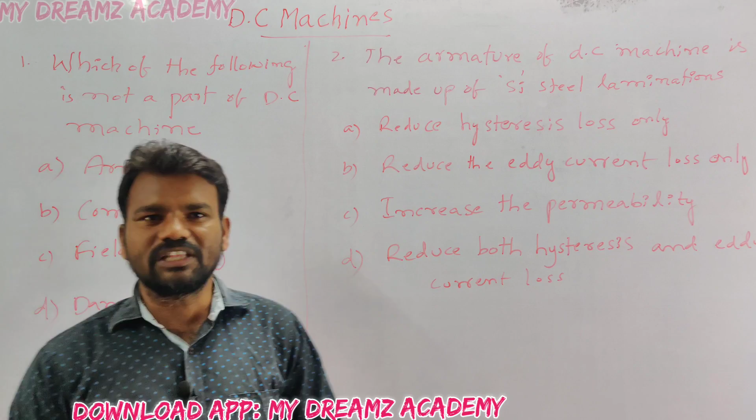Today we will see the DC machines topic. So in the DC machines, many questions, 8 marks questions will come here.

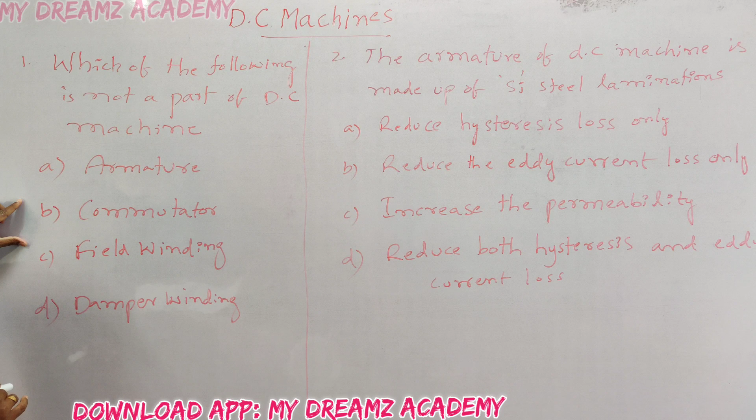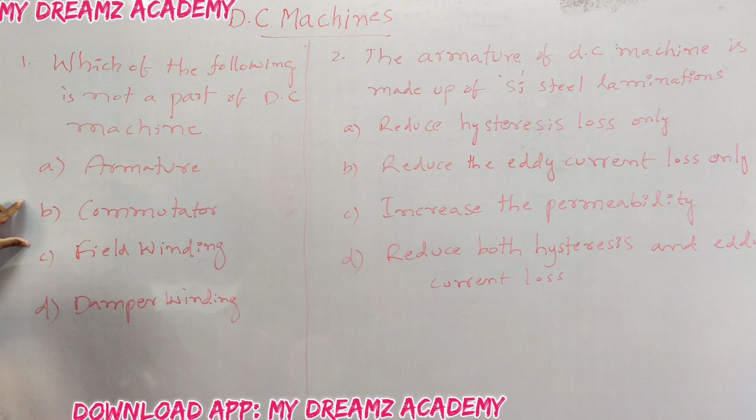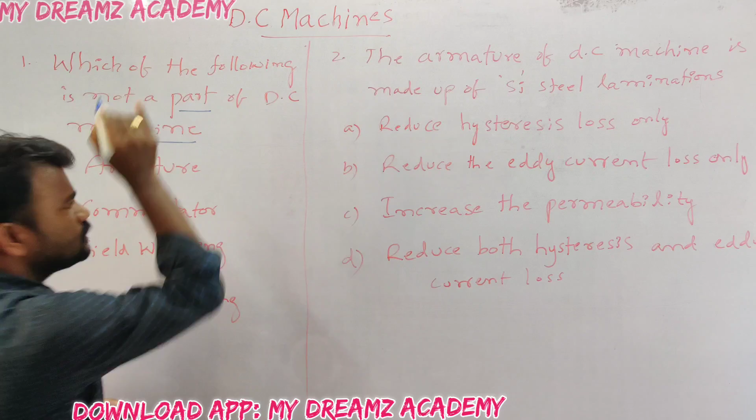Okay, which of the following is not a part of DC machines? So in the DC machine, how many parts we have? Part of DC machine. So here mainly it is our construction, yoke. The magnetic poles are attached here, the magnetic poles, and this one is the yoke, north pole and south pole.

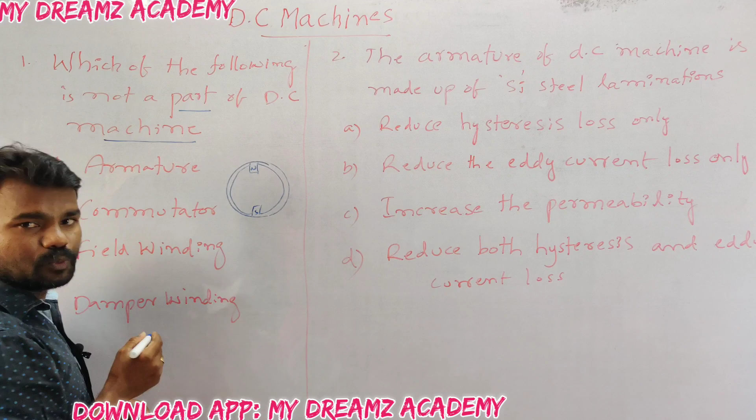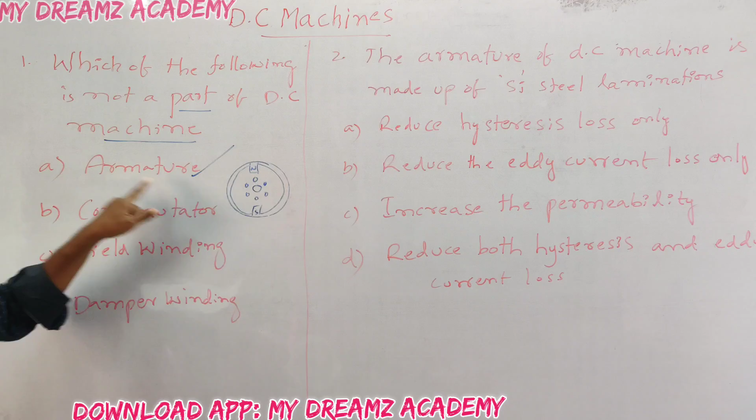Inside the magnetic field, the armature conductors are there. And also on the surface of the rotor, the commutator is also there. This one is the commutator. But here, not a part of DC machine. Armature is a part of our DC machine. This is our armature.

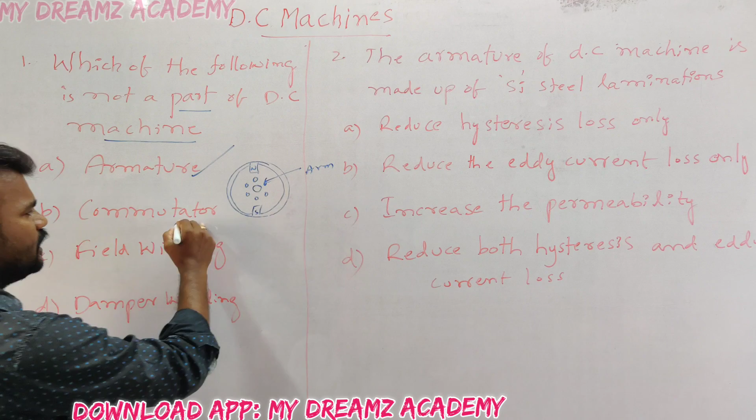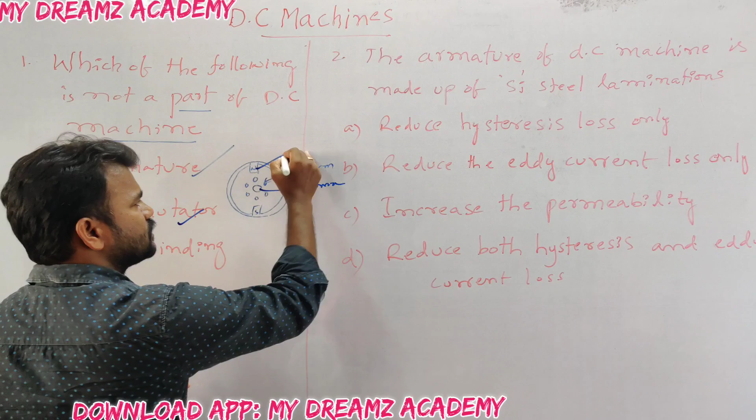And commutator is also a part of DC machine. This is our commutator. And third option, field winding is also a part of DC machine. But the fourth option is not a part of DC machine. So this is the answer. Which of the following is not a part of DC machine is damper winding.

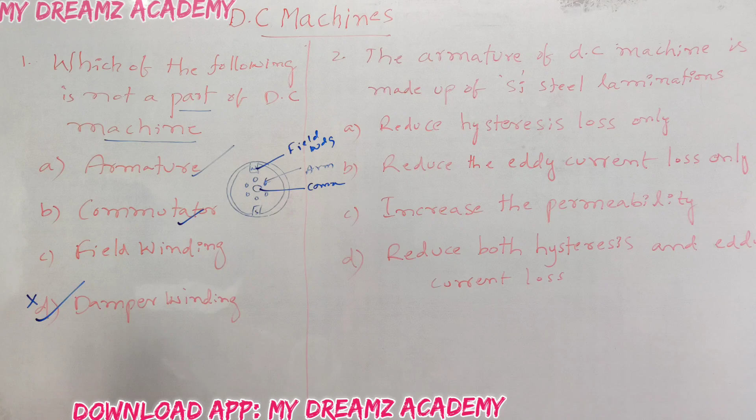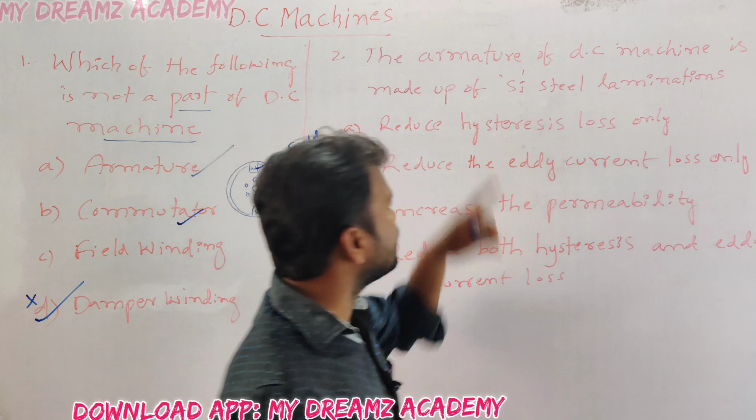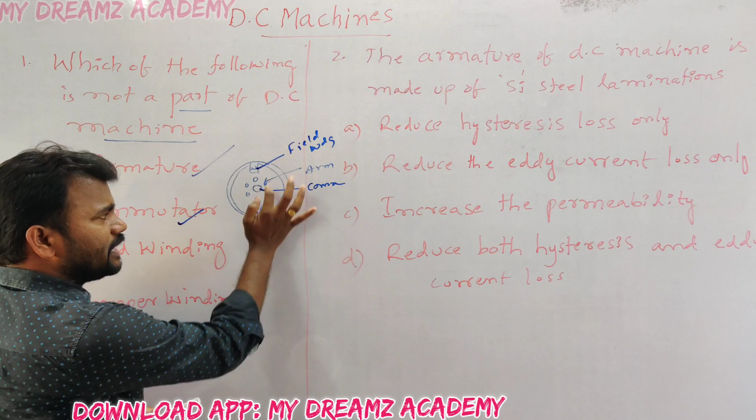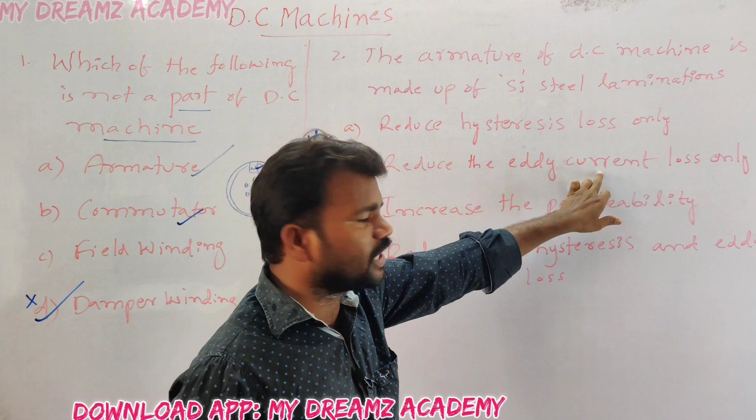So you must remember the construction of DC machine. Next we will go for the second question. The armature of a DC machine is made up of silicon steel laminations. Armature is inside the magnetic field. Options: first, reduce the hysteresis loss only. B, reduce the eddy current loss only. C, increase the permeability. Fourth, reduce both the hysteresis and eddy current loss.

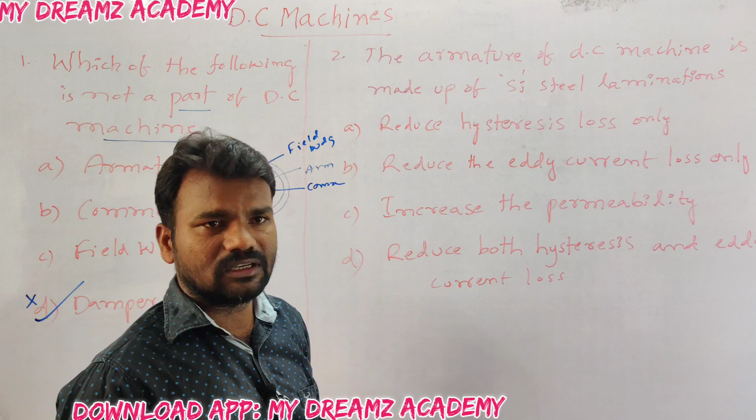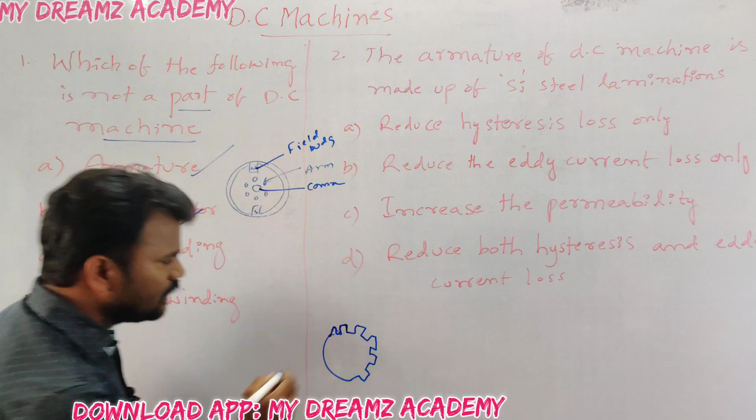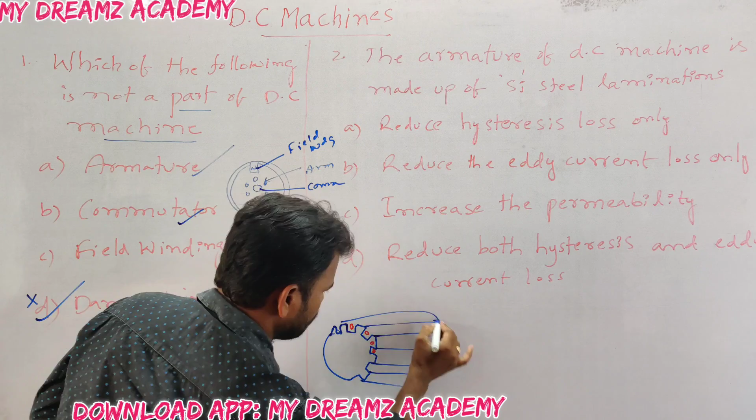So here we will see the armature. These are the slots for the armature. In this armature we are going to provide armature conductors. These are the armature conductors, like this.

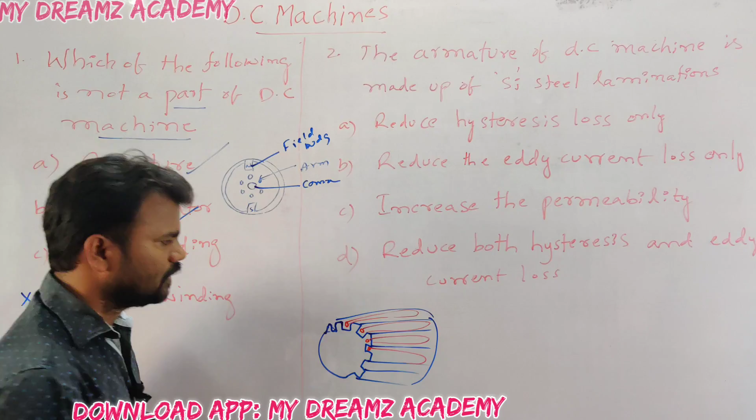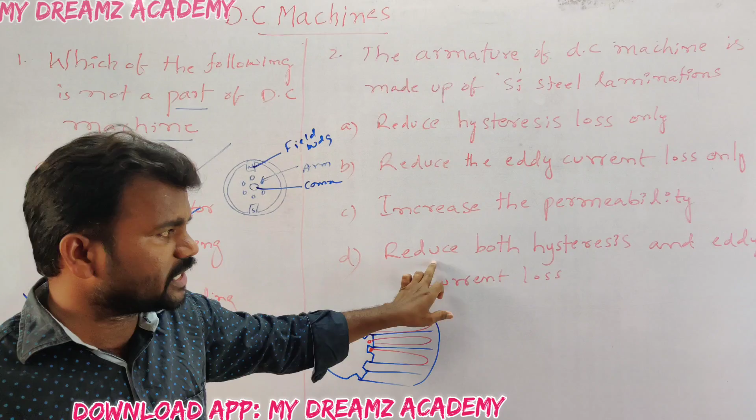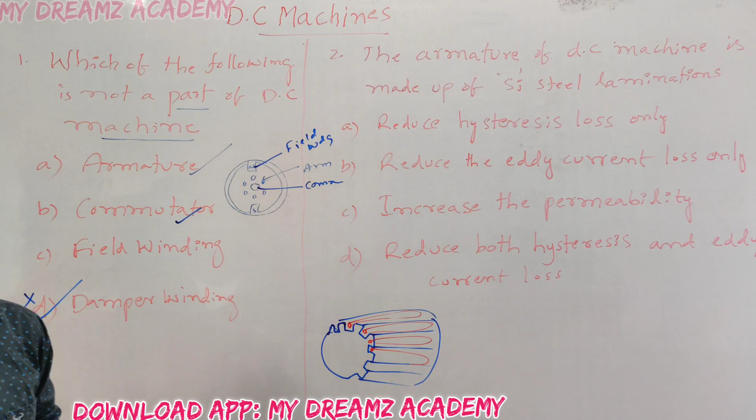So the armature of a DC machine is made up of silicon steel lamination to reduce the hysteresis loss only, reduce the eddy current loss only, increase the permeability, or reduce the hysteresis and eddy current losses. But armature is a core. So it is made up of silicon steel material to reduce the hysteresis loss.

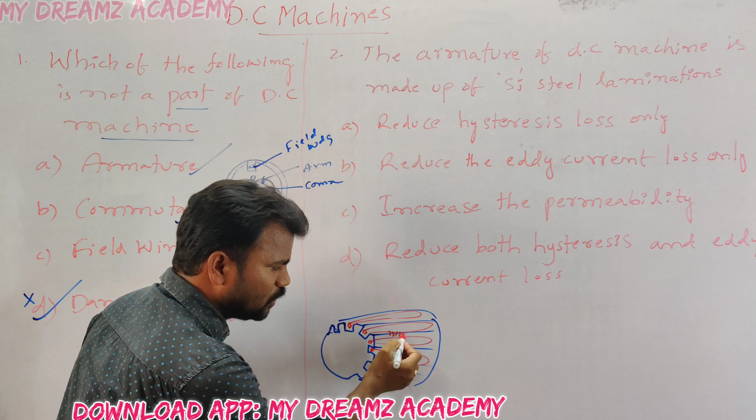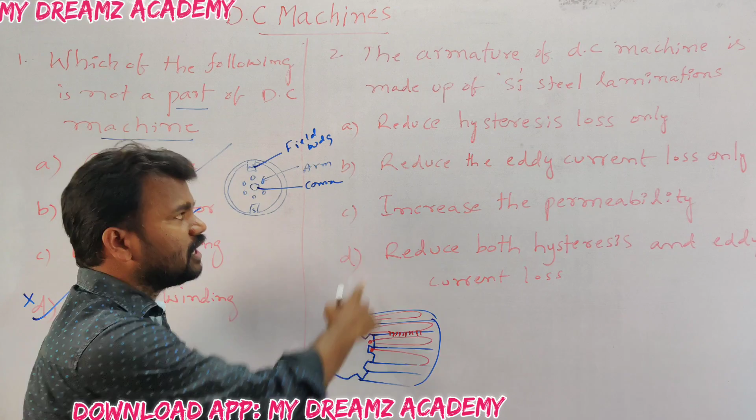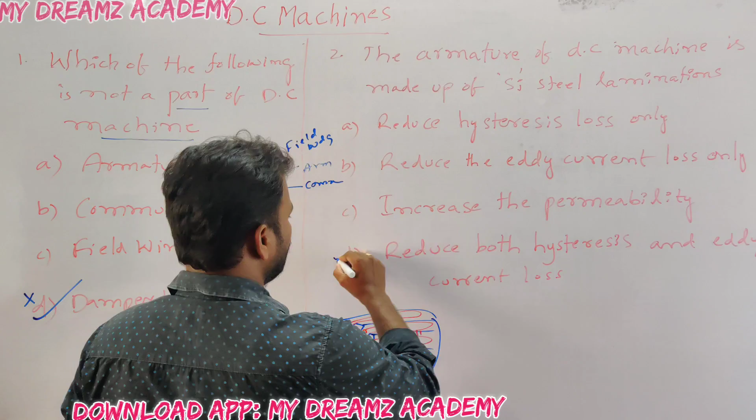And also conductor to conductor we are going to provide the laminations. So the silicon steel is provided and laminations are also provided. The silicon steel reduces the hysteresis loss and laminations reduce the eddy current losses. So the answer is the fourth option: reduce both hysteresis and eddy current loss.

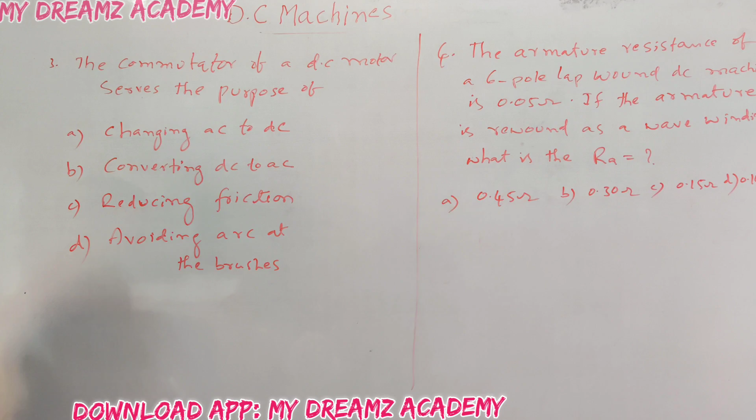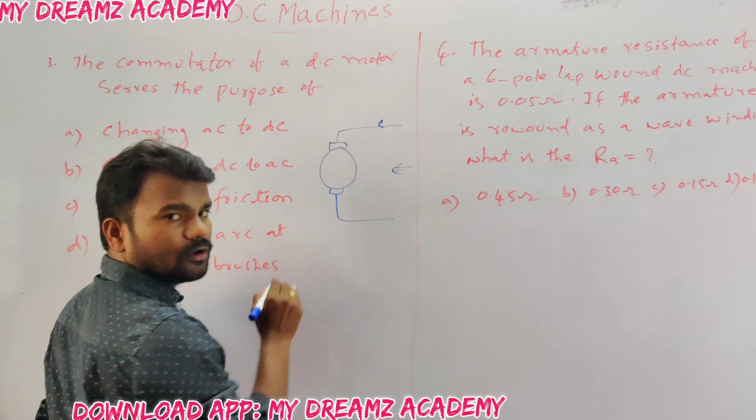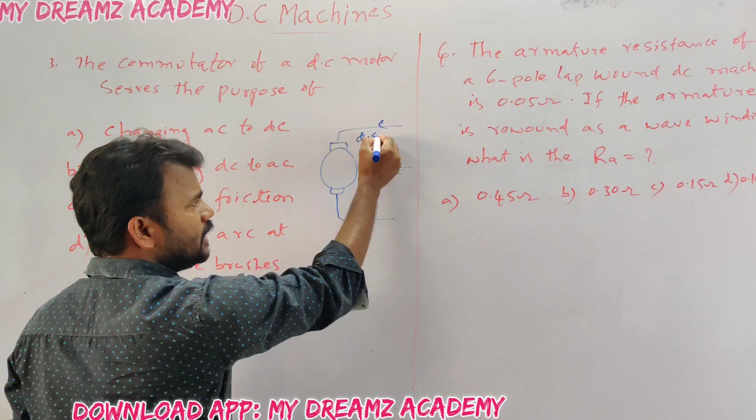The third question: the commutator of a DC motor serves the purpose of. In the DC motor, the commutator converts DC into AC. First we know the equivalent circuit of DC motor. This is our armature, the supply is given here. DC current is given to the brushes, and the brushes are collecting the current. The DC current is given to the armature conductors, which are connected to the commutator segments.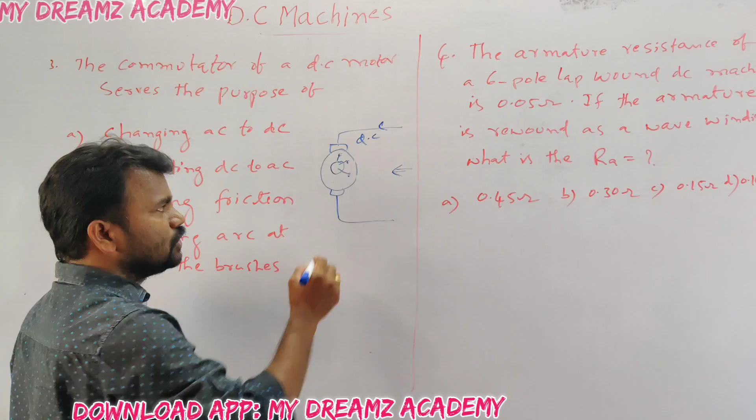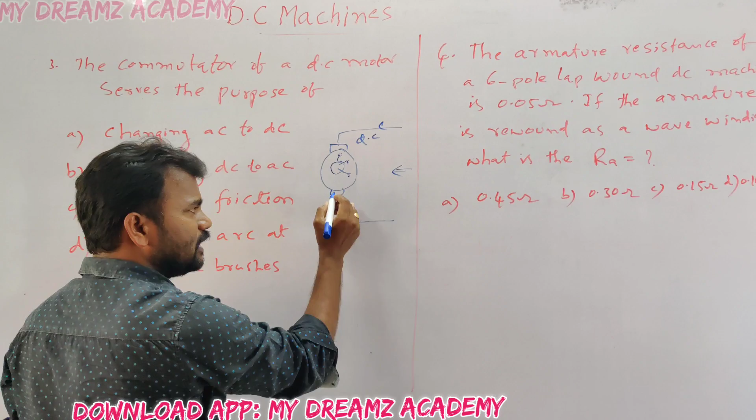So whenever current is given to the conductors, it can produce EMF in the armature conductors. That EMF is called AC EMF. If you take any machine, generator or motor, the AC EMF is induced across the armature conductors. The supply given to this machine is DC, and it converts to AC. So the commutator of DC motor serves the purpose of converting DC into AC. See the options.

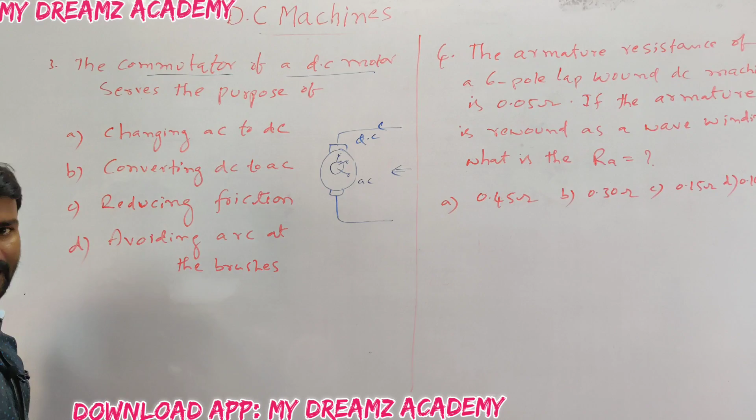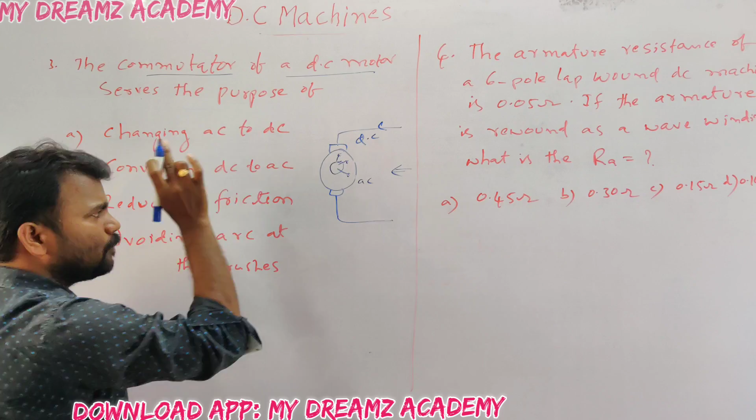Changing AC to DC is not possible in the DC motor, and converting DC to AC, this is our option. The electrical supply is DC, and it is converted so that AC is produced in the DC motor.

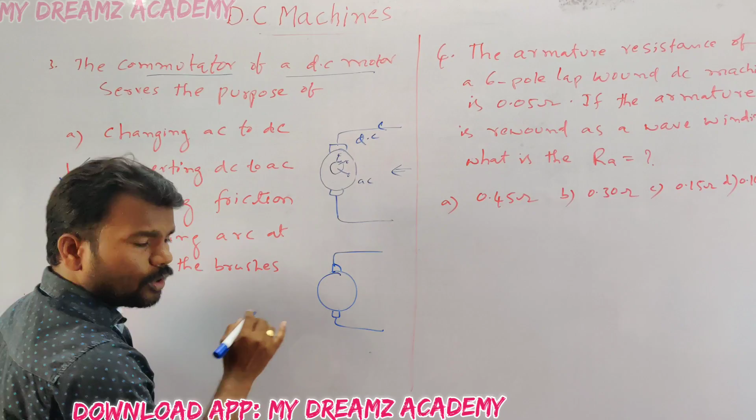Now go to the DC generator. This is our DC generator. Here the DC generator is coupled to the prime mover. Here there is the armature. This is our armature.

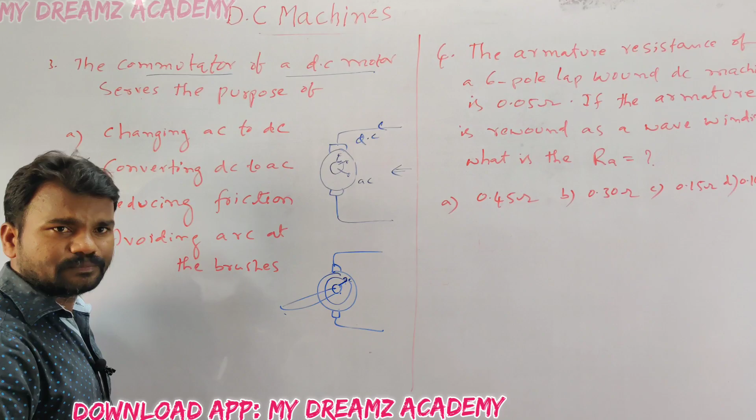Inside is the commutator. Whenever the prime mover is rotating, armature conductors are rotating in the stationary magnetic field, and a dynamically induced EMF is produced. That is, AC is produced in the armature conductors. The armature conductors are connected to the commutator segments, so the commutator converts AC into DC.

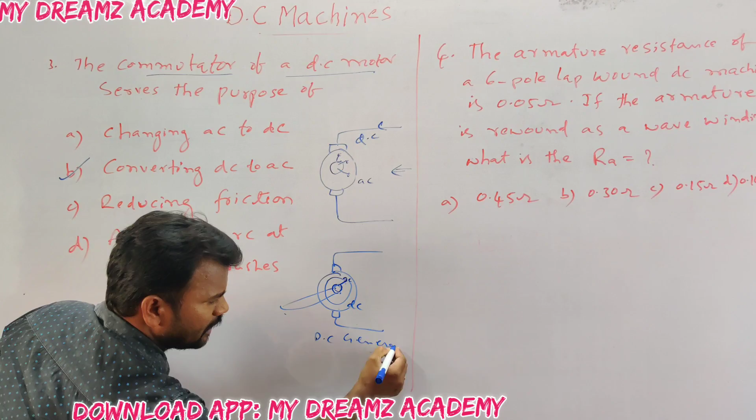In a DC generator, what is the commutator's purpose? In a DC generator, converting AC to DC. In case of a DC motor, converting DC to AC. Okay? Remember, the commutator of a DC motor converts DC to AC, and the commutator of a DC generator converts AC to DC. Remember these two, they are important. The other options, reducing friction and avoiding arc at brushes, are no use. This is our option for the DC motor.

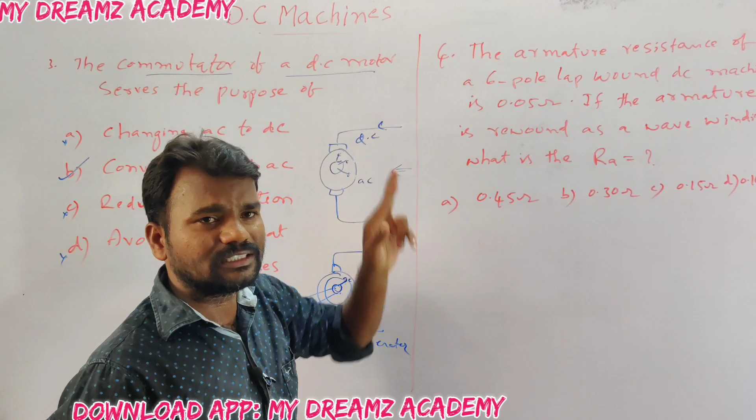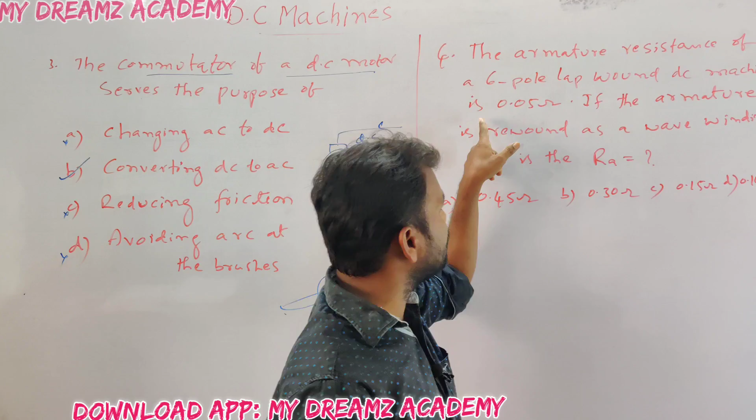Next we will see the fourth question. It is an important question, already repeated in the TS ESET 2018 paper. What data is given here? The armature resistance of a 6-pole lap wound DC machine is 0.05 ohms. If the armature is rewound as a wave winding, what is the armature resistance?

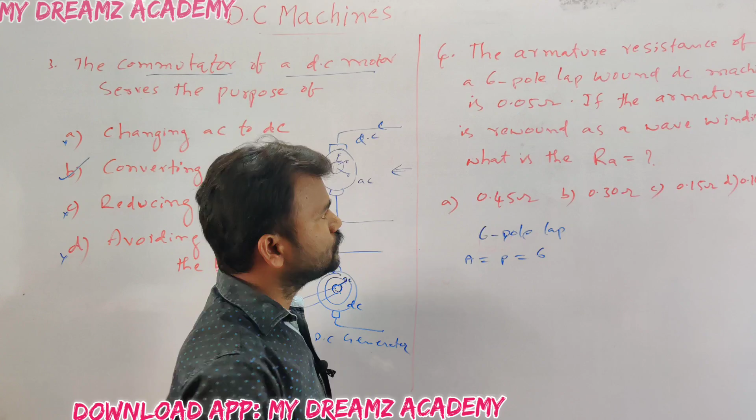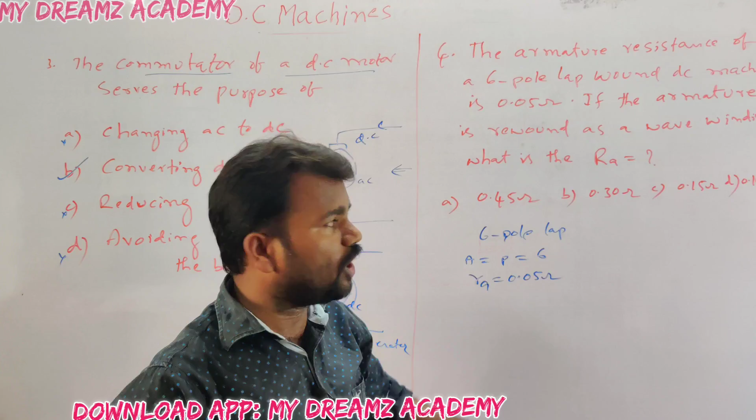First we'll see what data is given. 6-pole lap wound is given, so A is equal to P is equal to 6. In lap winding, the number of parallel paths is equal to the number of poles. The armature resistance given is 0.05 ohms. If the armature is rewound as a wave winding, what about the armature resistance?

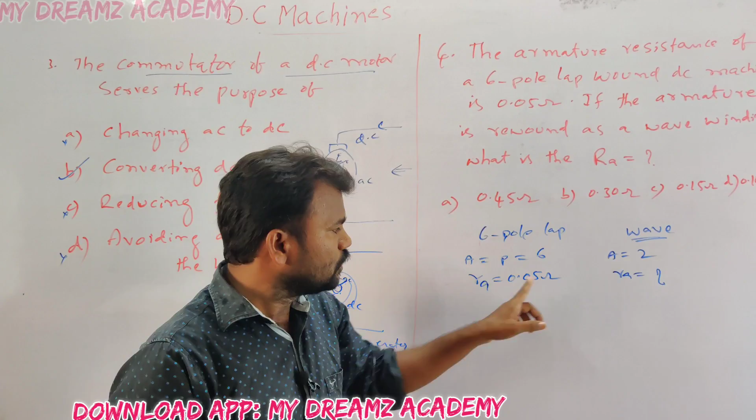In lap winding, the number of parallel paths is equal to the number of poles. In wave winding, the number of parallel paths is always equal to 2. From this, if we know the number of parallel paths and armature resistance, we have one formula: armature resistance is inversely proportional to the square of the number of parallel paths. Using this relation, you can calculate RA2; this one is RA1.

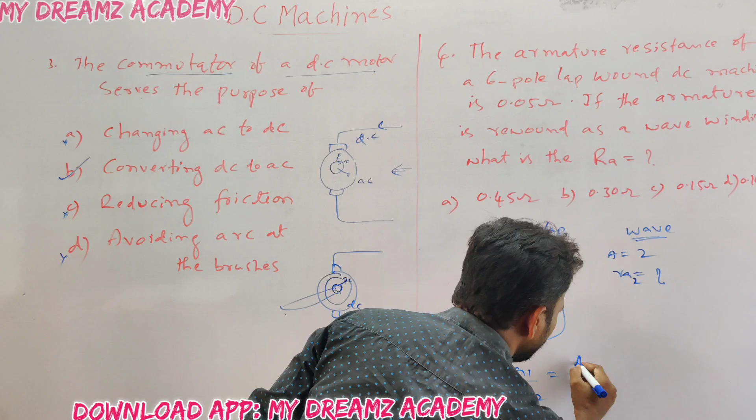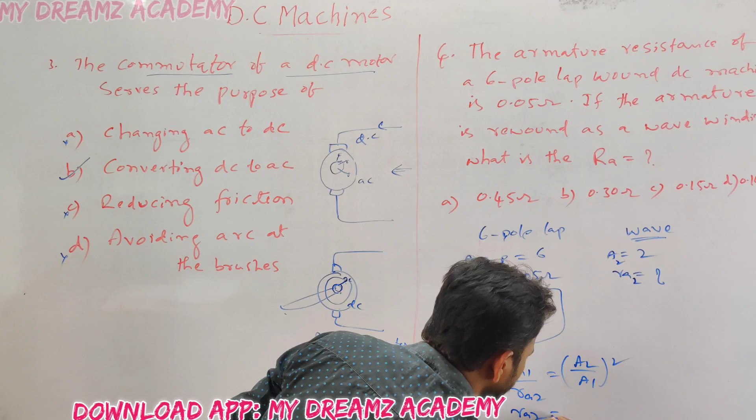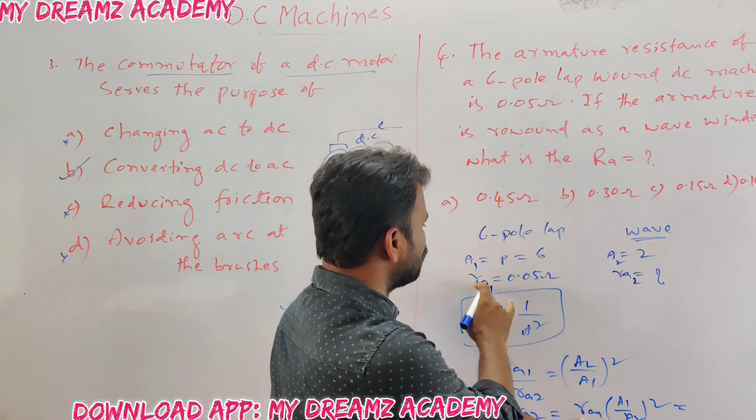So the relation is RA1 by RA2 is equal to (A2 by A1) whole square. This one is A1 and this is A2. Substitute here, and we calculate RA2 is equal to RA1 into (A1 by A2) whole square. RA1 is 0.05, A1 is 6, and A2 is 2, whole square.

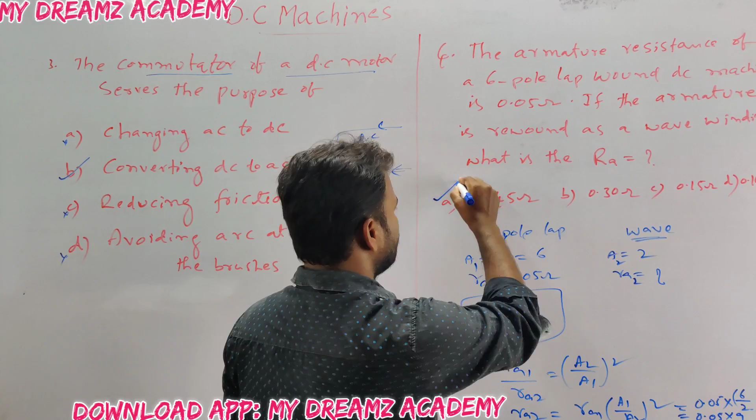6 by 2 is 3, and 3 square is 9. 0.05 into 9, total is 0.45 ohms. Check the options: 0.45 ohms, so our option A is right. Remember this relation.

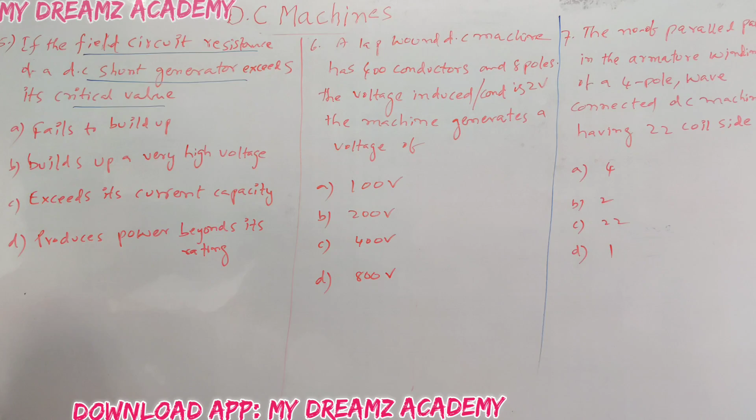The next question, fifth question: if the field circuit resistance of a DC shunt generator exceeds its critical value. For this question, we should know the open circuit characteristics of a DC shunt generator, and the relation between field circuit resistance and critical value.

Roughly, I am going to draw the characteristics. Here is the generated EMF, and this one is the field current. When the field current is 0, only residual magnetism is there, and the curve is like this. Now the field current increases up to the rated field current, and for the rated field current, the rated EMF is induced. This is the rated field.

If the field current increases further, no flux increases in the DC generator. The flux is constant, meaning the EMF is also constant; it does not build up, it is not rising. This is our open circuit characteristic or magnetization characteristic. This is our field winding circuit resistance: voltage is known and current is known, voltage by current gives the field circuit line, like this.

If the field circuit resistance increases toward the y-axis, the line moves up. When the field circuit resistance line touches this, only residual magnetism is there, meaning only the residual voltage is there. That's why the critical resistance means the line is tangent to the OCC curve.

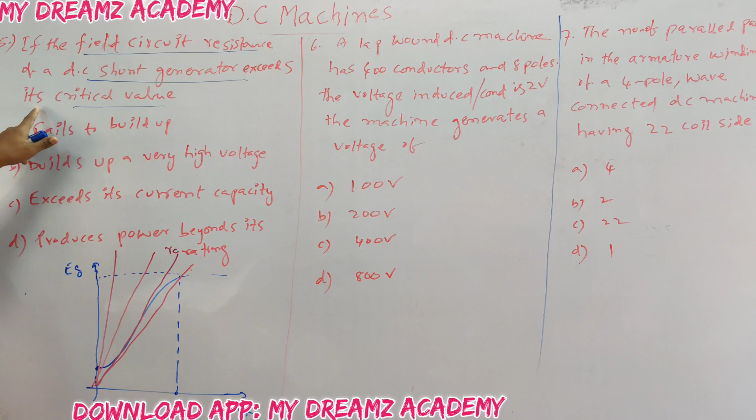The question is: if the field circuit resistance of a DC shunt generator exceeds its critical value. This is our critical resistance. Above the critical resistance, the voltage does not build up. The critical resistance means it is tangent to the OCC curve. So if the field circuit resistance of a DC shunt generator exceeds its critical value, it fails to build up.

This is our answer. These are all wrong options. But the critical resistance you remember, this is our field circuit resistance.

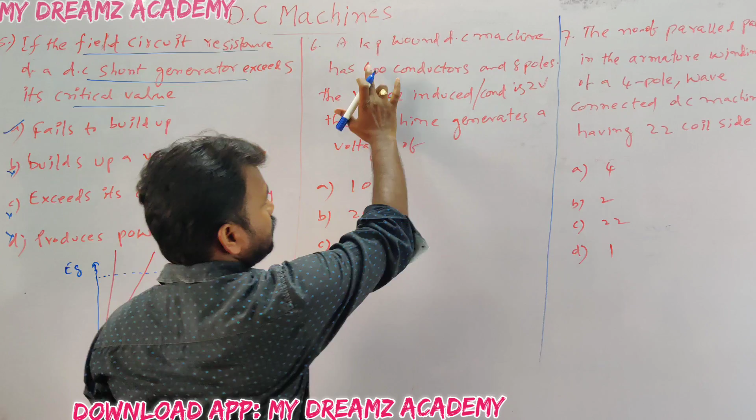Now go to the next question, sixth one. A lap wound DC machine has 400 conductors Z and 8 poles. Lap wound means A is equal to P is equal to 8 poles in the lap winding. The voltage induced per conductor is equal to 2 volts per conductor, and the machine generates a voltage of, question.

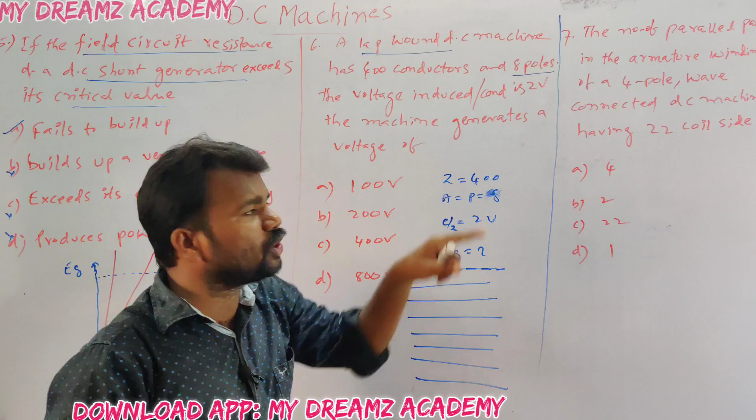Here the lap wound is given means these are all equal, number of parallel paths. Total conductors is 400, so here 8 parallel paths are there. First in the lap winding we need 8 parallel paths: 1, 2, 3, 4, 5, 6, 7, 8 parallel paths. Just we have to divide, so 50 conductors are there in each path: conductor 1, 2, 3, up to 50 conductors. So here 50 conductors means, per conductor is equal to how much voltage? 2 volts. So the conductor, 50 conductors are there, 2 volts, 2 volts, 2 volts. Total 100 volts are there, only 100 volts. This is our option.

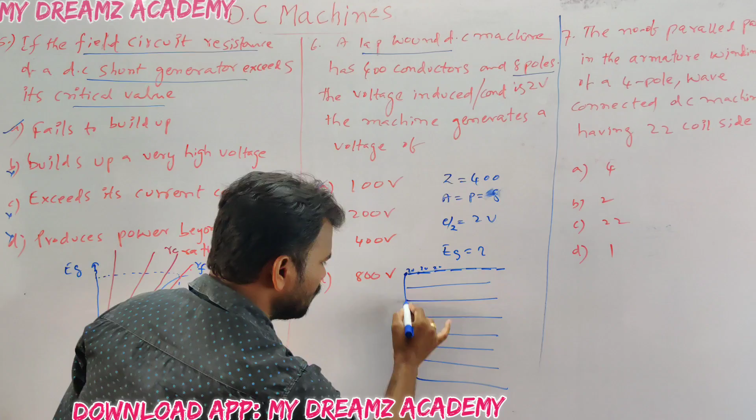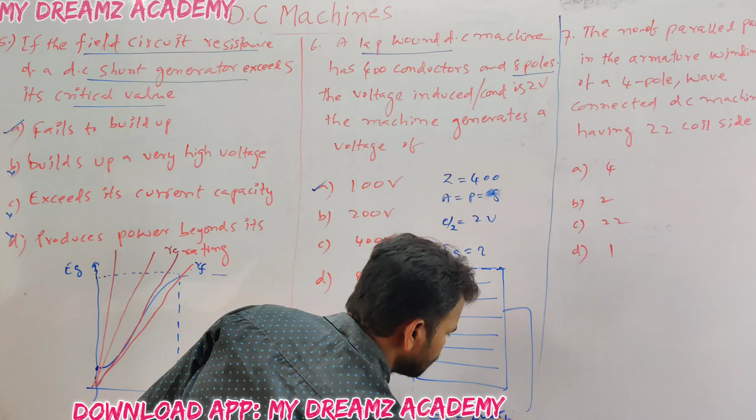These are the parallel paths connected here across the generated EMF. This is our generated EMF. So the 2 volts per conductor, per conductor how much here? 50 conductors are there in the series. So that is 100 volts can be generated. The option is 100 volts.

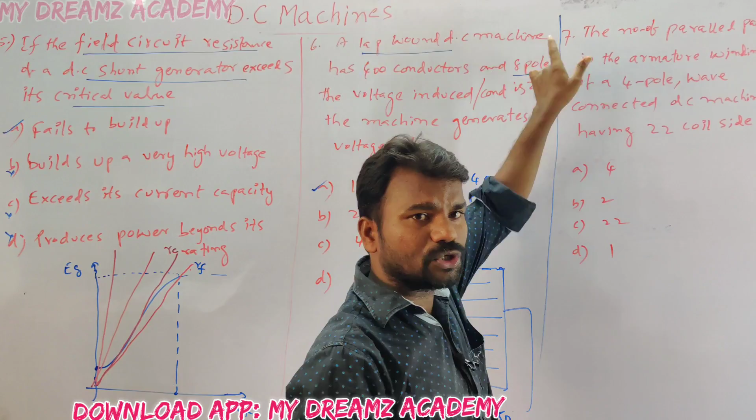Next go to the 7th question. This question came in TS ESET 2019 paper. The number of parallel paths in the armature winding of a 4-pole, the wave connected DC machine having 22 coil sides. This machine is connected in the wave winding, having 22 coil sides.

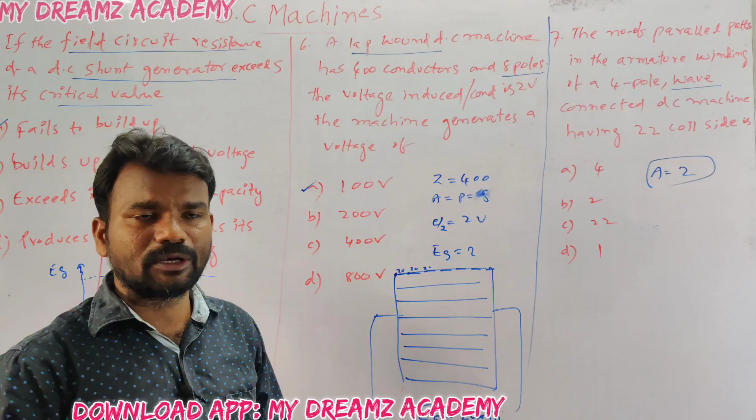What is our answer? The number of parallel paths in the armature winding of a 4-pole means, just remember, this machine is having wave connection. In the wave connection, the number of parallel paths is always equal to 2, irrespective of the coil sides. Just remember this one, option is 2.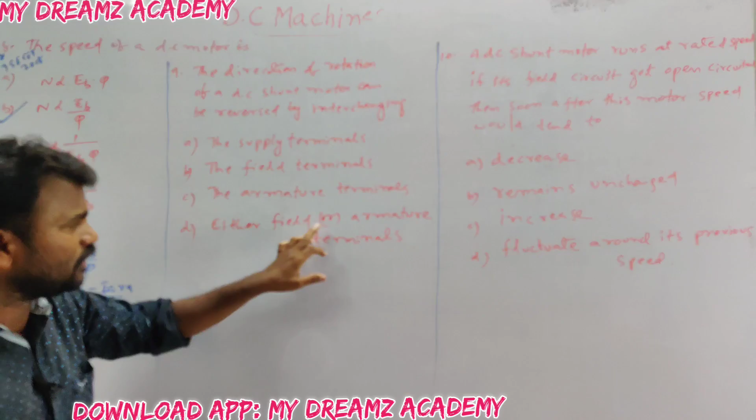Next, 9th question. The direction of rotation of a DC shunt motor can be reversed by interchanging. These are the options: the supply terminals are interchanged, the field terminals are interchanged, the armature terminals, or either field or armature terminals.

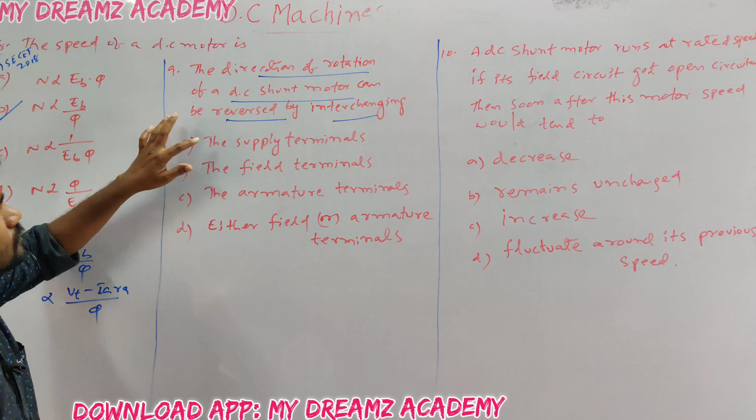What is our question? The direction of rotation of a DC shunt motor can be reversed by interchanging the terminals. By interchanging the field terminals, our DC shunt motor can run reverse. Also the armature winding terminals can be interchanged, our DC motor can also run reverse. So either field terminal or armature terminal changes, our DC motor will be reversing. It is not the supply terminals - supply terminals means our DC motor is running constant. If the field terminals are changed, our DC motor is reverse. And armature terminals also changed, our DC motor will be reverse.

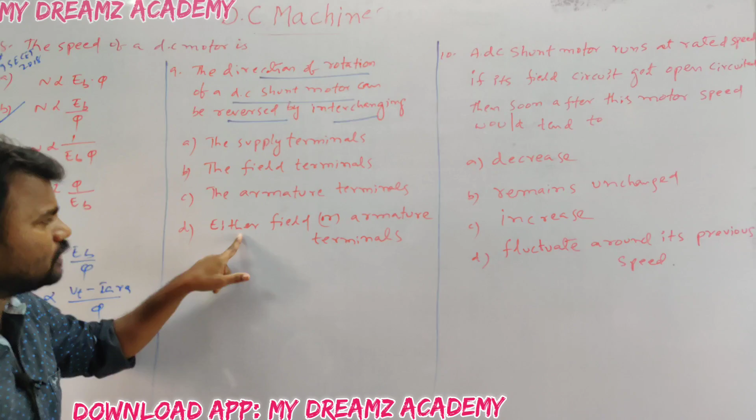So the option is D. Either field terminals or armature terminals can be changed, then only our DC motor will be rotating in the reverse direction. Either of the terminals can be reversed, then only the DC motor can be reversed. The option is 4. And this is another expected question, 10th question.

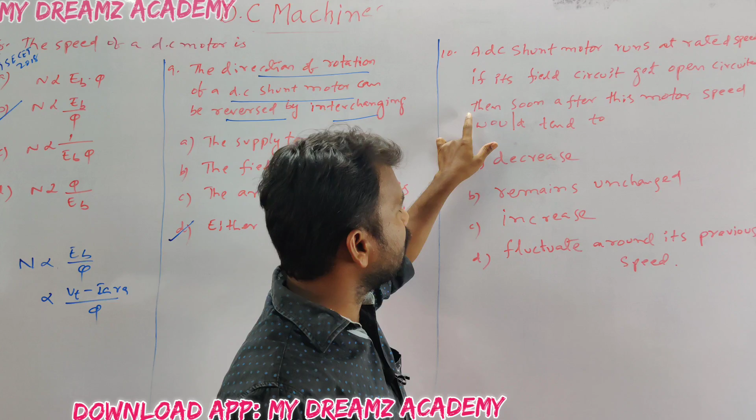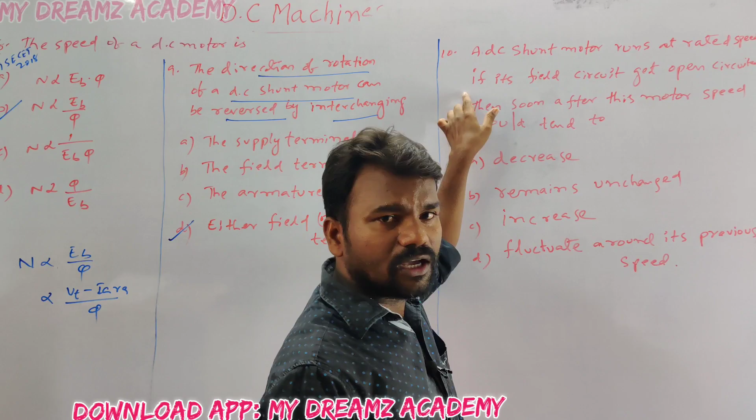A DC shunt motor runs at rated speed. If its field circuit gets open circuited, then soon after, this motor speed would be - what is the speed of the DC motor?

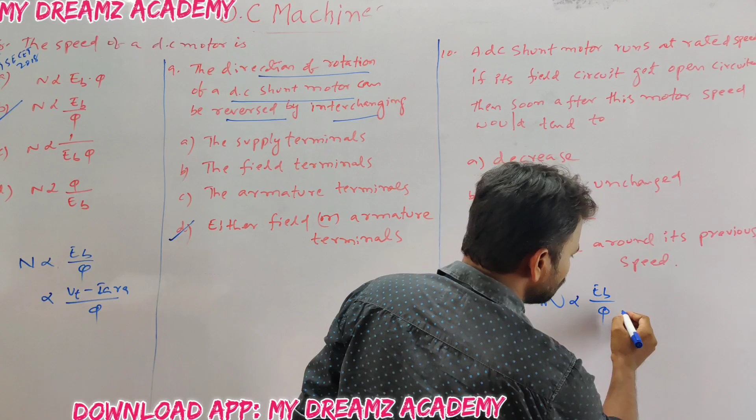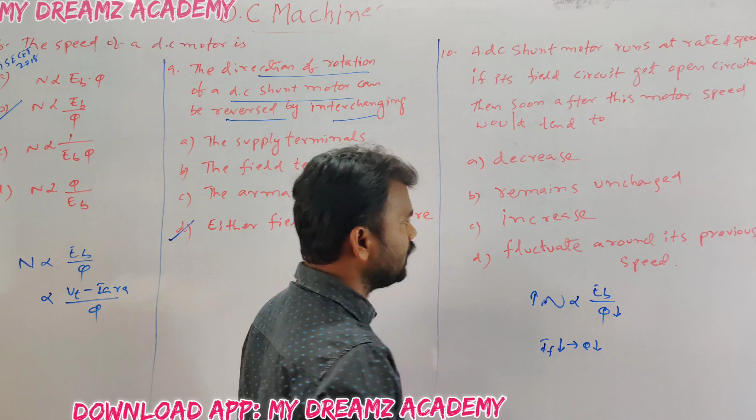Speed of the DC motor is directly proportional to back EMF and inversely proportional to flux. If the field current gets open, field current goes to 0 and flux also goes to 0 - if the flux reduces, the speed will increase. Speed is directly proportional to back EMF and inversely proportional to flux. If the field circuit is open, meaning field current is 0 and flux is reduced to residual flux, and flux reduces, speed will be increased. This is the C option.